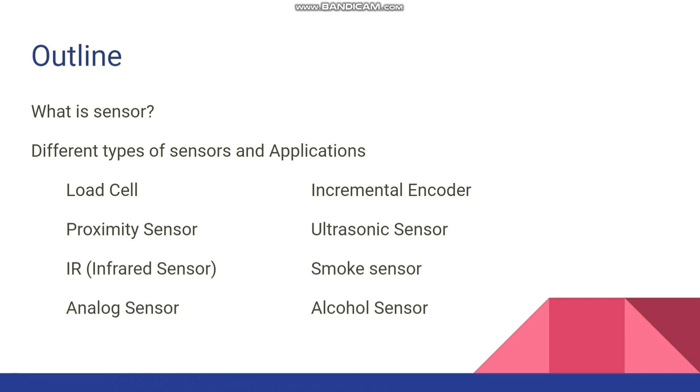and alcohol sensor. So let's define first what is a sensor. According to Merriam-Webster Dictionary, its definition is a device that responds to a physical stimulus such as heat, light, sound, pressure, magnetism, or a particular motion, and transmits a resulting impulse as for measurement or operating a control.

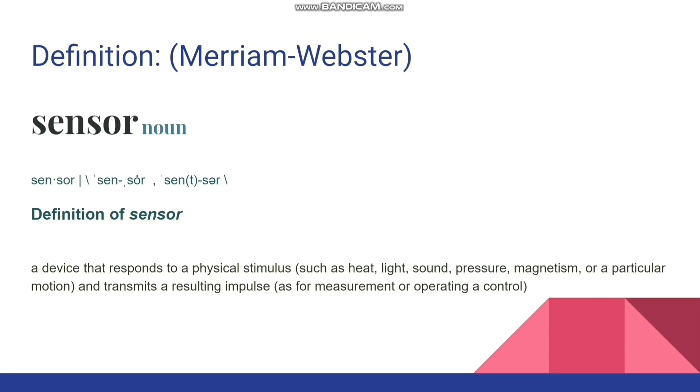So these are the block diagrams where a sensor is actually being used. Frequently measured values are temperature, pressure or force, flow, humidity, pH value, revolution per minute or speed or velocity, and also the position.

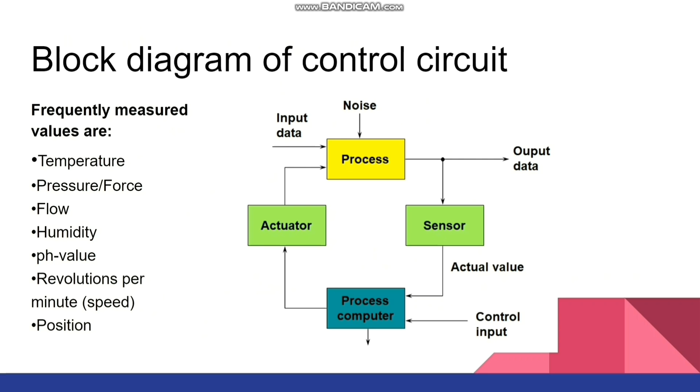So the advantages of sensors: there is no physical contact and therefore no stress, no wear, tear, and hence long life. Contactless, and therefore maintenance free. Electronic high precision, protected and safe switching in harsh environments, high switching rate, bounce-free contact, thus not prone to pulses.

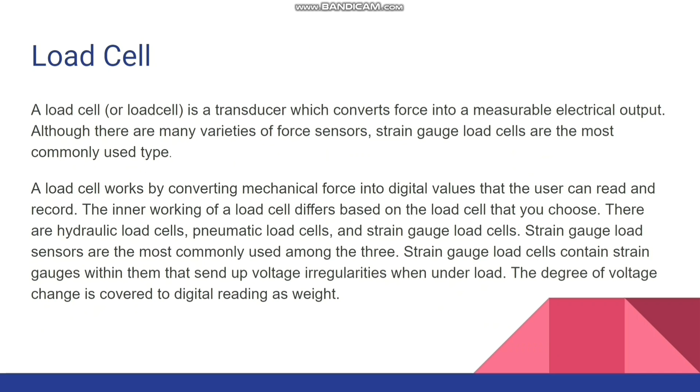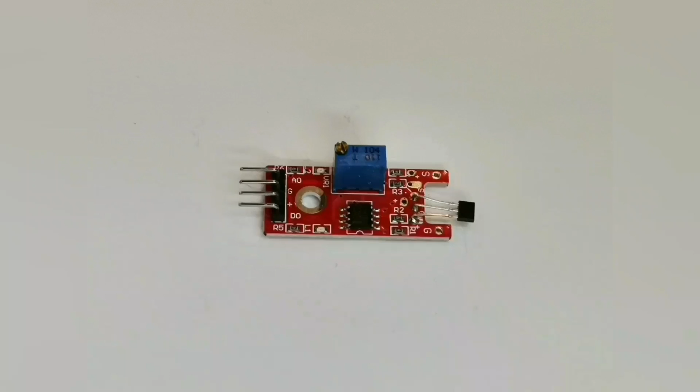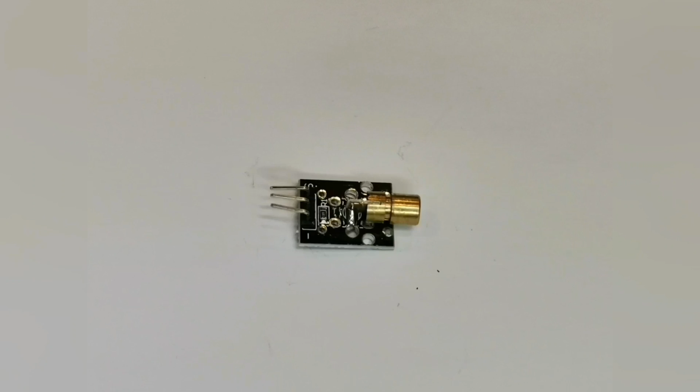Mechatronics engineering deals with various sensors depending on the different applications for your project needs. In this lecture, I will be discussing different sensors from what I bought online, the 37 sensor kit.

This time we will talk about proximity sensor. A proximity sensor is an electronic sensor capable of detecting the presence of nearby objects without physical contact. It emits an electromagnetic field or a beam of electromagnetic radiation, for example infrared, and then looks for the changes in the return signal or field.

The object that is being sensed is the proximity sensor's target. Depending on the proximity sensor's target, different sensors may be used. For example, an inductive proximity sensor requires a metal target, whereas a capacitive or photoelectric sensor may be suitable for a plastic target.

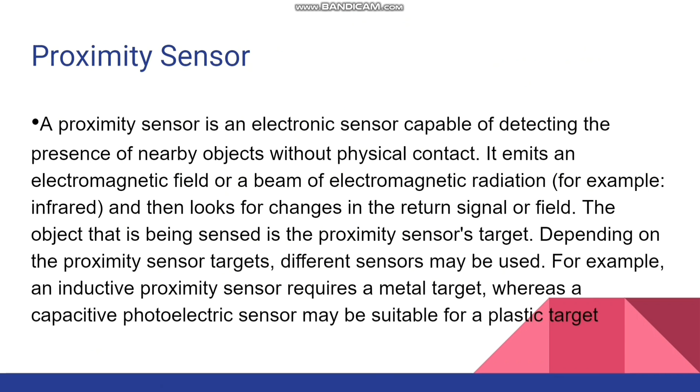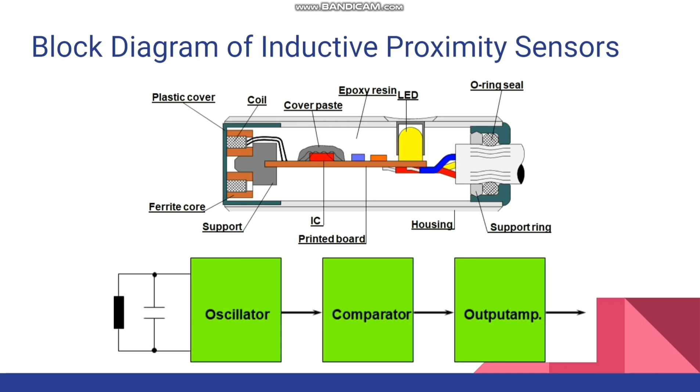On the lower part of the illustration is the block diagram of the inductive proximity sensor, whereas there is an oscillator, comparator, and the output amp.

So the physical basics of the proximity sensor: the alternating electromagnetic field created by the coil induces eddy currents in the target if the target is made of non-ferromagnetic material. Then the alternating electromagnetic field created by the coil induces eddy currents and generates magnetic losses in the target if the target is made of ferromagnetic material. Magnetic losses are higher than the losses generated by the eddy currents.

Operating distances may vary on the target materials and are normally shorter than the usable operating distance. They may increase in case of a target of thin foils. So the basics of the inductive sensor: there is a primary circuit or sensor coil, then there is a secondary circuit for the target.

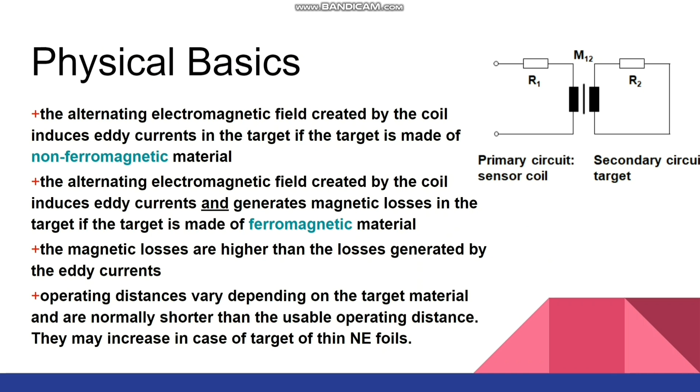So the definition of operation: SN meaning rated operating distance, or SN is the rated operating distance. SR is the effective operating distance, wherein SN times 0.9 is less than or equal to the effective operating distance, or less than or equal to 1.1 times Sn.

So SU is the usable operating distance. These are for the single proximity switch: voltage between 85% and 110% of rated operating voltage, temperature range of negative 25 degrees Celsius to positive 70 degrees Celsius.

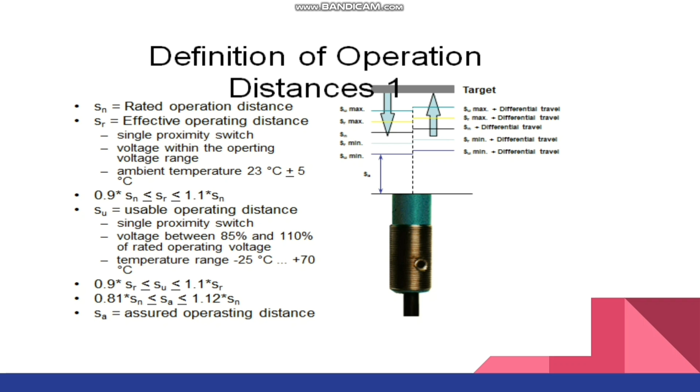So these are the basics of distances: usable operating distance, rated operating distance, and effective operating distance.

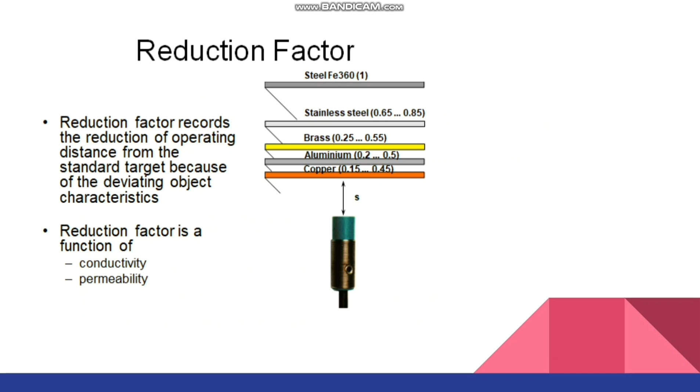So there is a reduction factor. The reduction factor records reduction of operating distance from the target because of deviating object characteristics. Reduction factor is a function of conductivity and permeability, so depending on the material, there are different reduction factors.

So the influence of target characteristics: when the area A times B is smaller than the area of the standard target, operating distance decreases. Whereas when the area A times B in the diagram is larger than the area of the standard target, there is no influence.

When the target is thicker than the standard target, the influence is a function of penetration depth - low penetration depth and high penetration depth - for small and big proximity switches respectively on operating distance. When high penetration depth or big proximity switches, operating distance decreases.

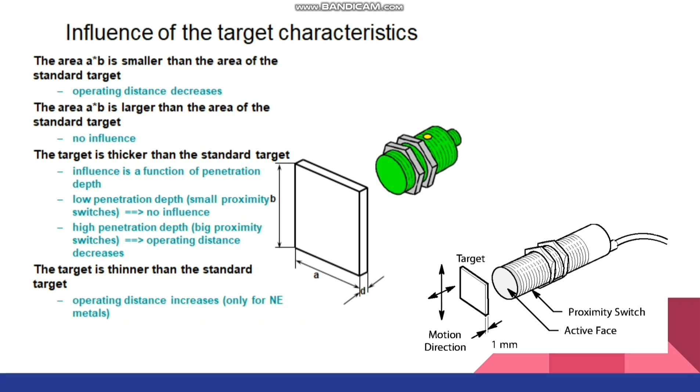So the target is thinner than the standard target. When the target is thinner than the standard target, operating distance increases only for NE metals.

Differential travel: this is the distance between the operating point when the target approaches the proximity, this is the differential travel H, less than 20% of the effective operating distance, or SR.

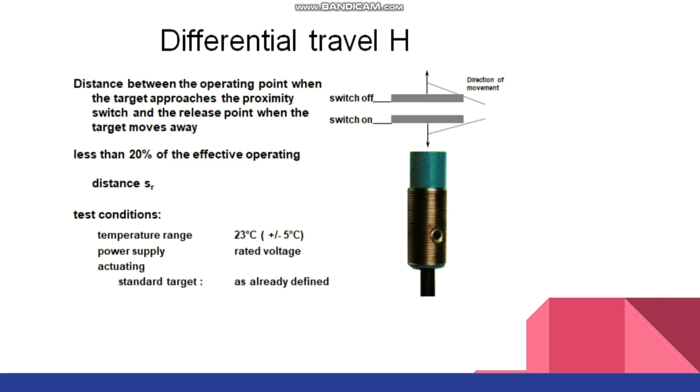Frequency of operating cycles for inductive proximity sensors is the number of operating cycles performed by the proximity switch during a specified period, this is the frequency of operating cycles, or F. This value is a function of the oscillating frequency of a given proximity switch. High oscillator frequency means small operating distance or high frequency of operating cycles, whereas low oscillator frequency means large operating distance with low frequency of operating cycles.

So this is how we connect it with the PLC. It could be wired NPN or PNP. Maximum frequency of operating cycles is 5 kilohertz, or equal to 200 microseconds.

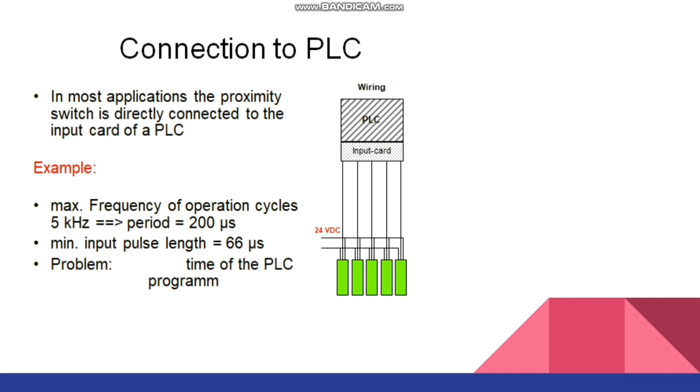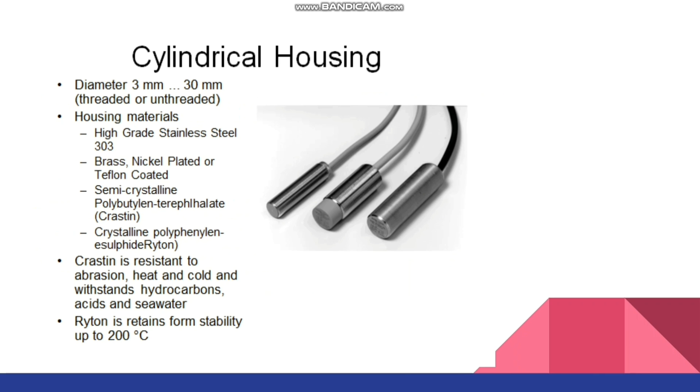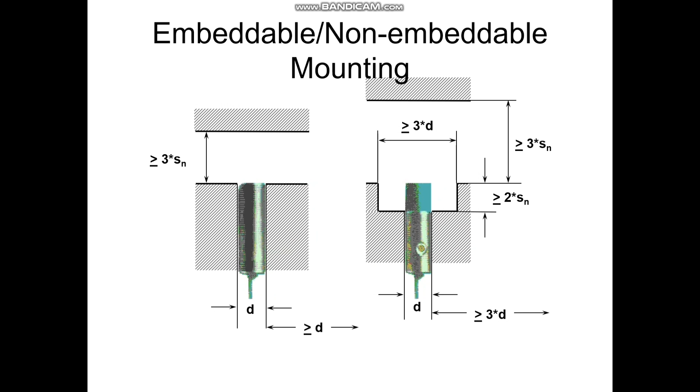Then there is a cylindrical housing with a diameter standard from 3 mm to 30 mm. This is the embedded and non-embedded mounting for the inductive proximity switches.

There are advantages and disadvantages of embeddable mounting. Advantages: no mutual influence when the distance between two proximity switches is greater than the diameter or length of the sensing face, real flush mounting in conductive material, and less sensitivity than non-embedded mountable proximity switches to fault-inducing influences.

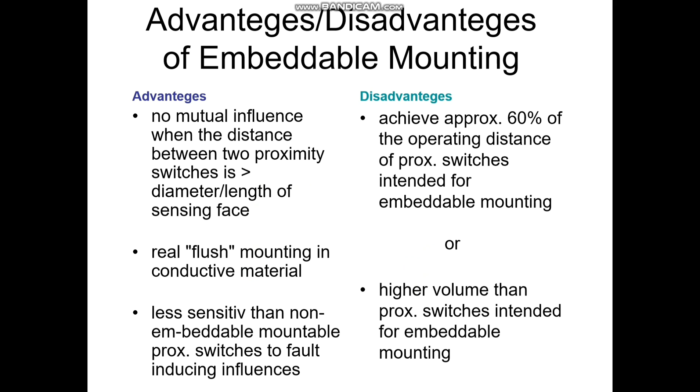The disadvantages: there is an achievement of approximately 60% of the operating distance of proximity switches intended for embeddable mounting, or there is a higher volume than proximity switches intended for embeddable mounting.

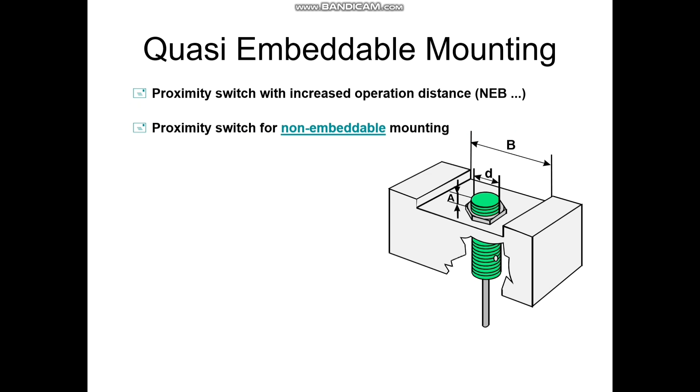So this is the quasi-embeddable mounting - proximity switches with increased operating distance, proximity switches for non-embeddable mounting. For ferromagnetic materials, A is equal to 0.2 times D.

Then for non-ferromagnetic material, A is equal to 0.1 times D. For non-conductive materials, A is equal to 0. Distance between two proximity switches is equal to D.

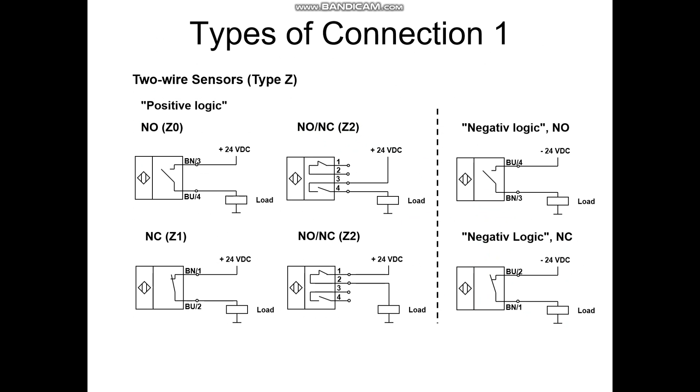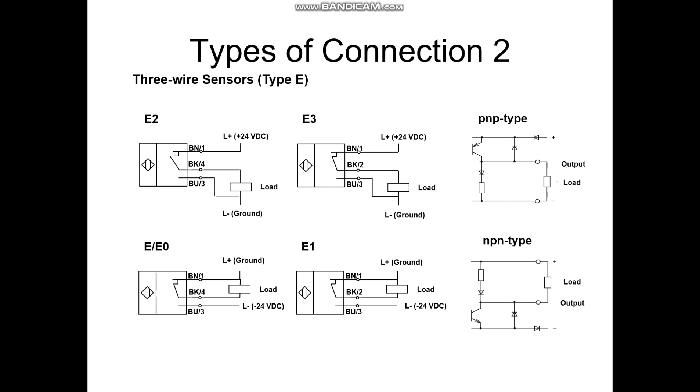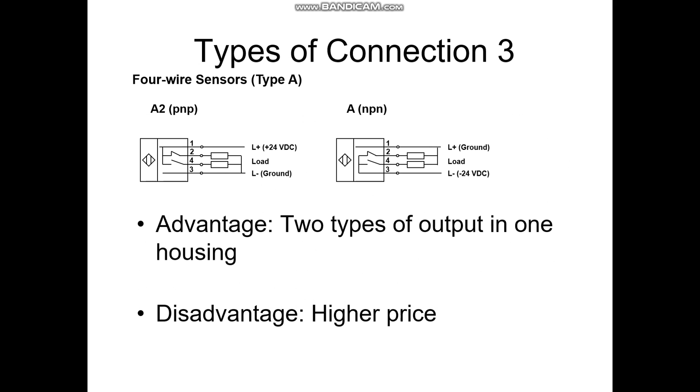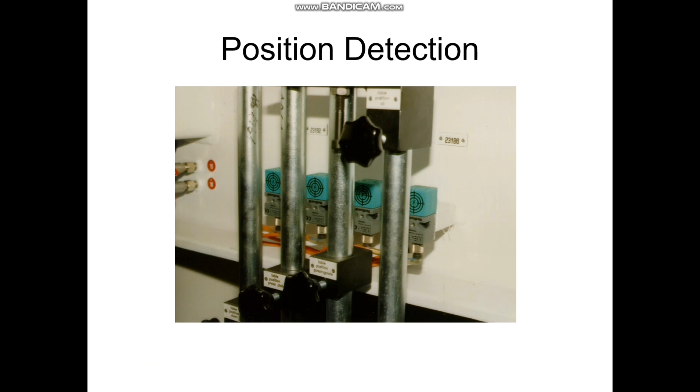Disadvantage: higher price. Examples of inductive proximity switches are position detector for doors, position detection for conveyor systems, detection of position for fluids, speed control for conveyor systems, and thread control. There are other examples, but these are the example applications for this particular inductive proximity switch.

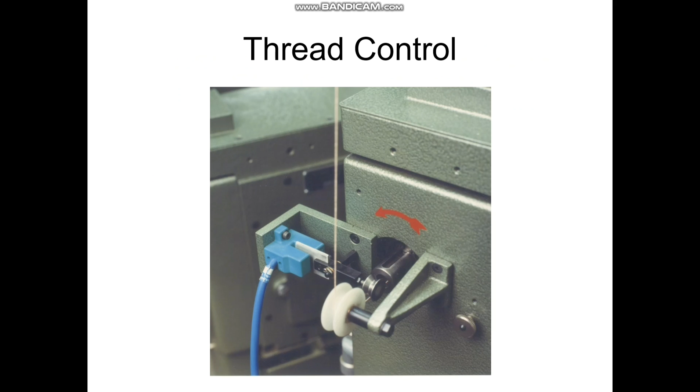So another type of proximity switch is the capacitive proximity switch. The characteristics of this type of switch detect every type of material like conductive, non-conductive, solids, and liquids, depending on the dielectric constant.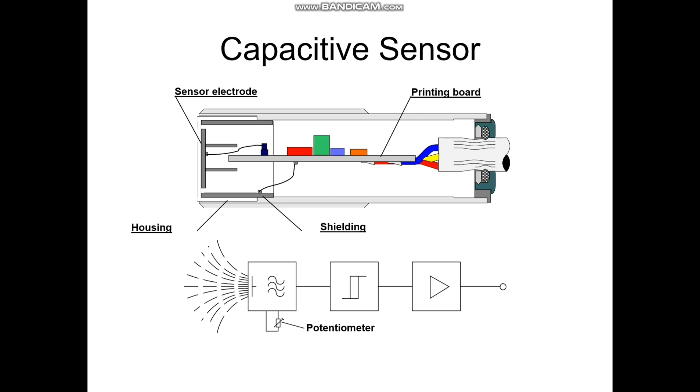There is a potentiometer wherein you can adjust the dielectric constant or the sensitivity of your sensor depending on the material that you are going to use.

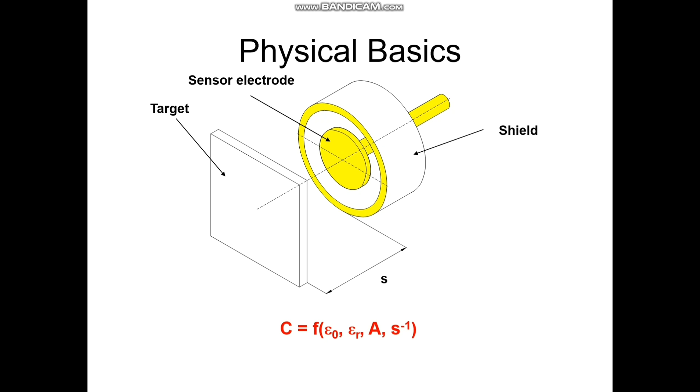Then there is the physical basics of this particular sensor: a shield, the electrode or sensor electrode, and the target. There is a particular distance which is the operational distance of the sensor to the target.

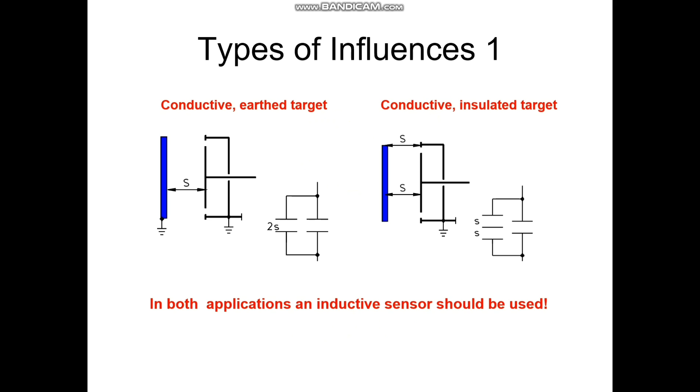Types of influences: conductive earthed target and conductive insulated targets. In both applications, an inductive sensor should be used. Number two, influence - this is the typical application of capacitive sensor. The switching distance depends on the relative permittivity, or the reduction factor.

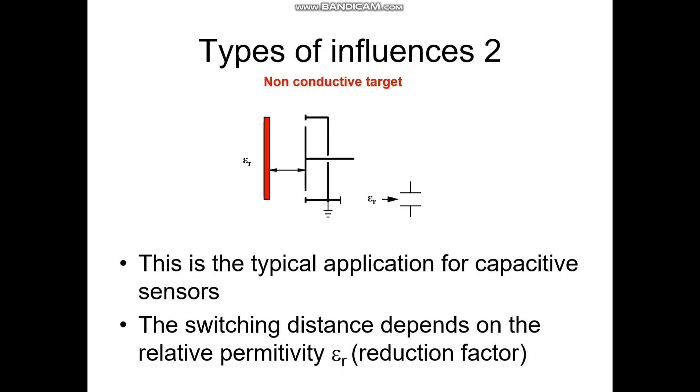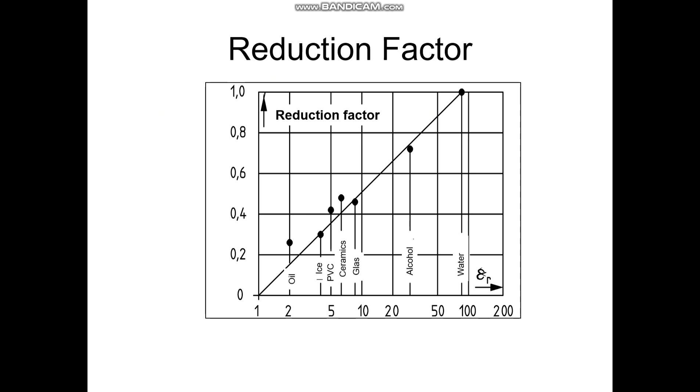Permittivity. So depending on the material, there is a reduction factor of the sensor.

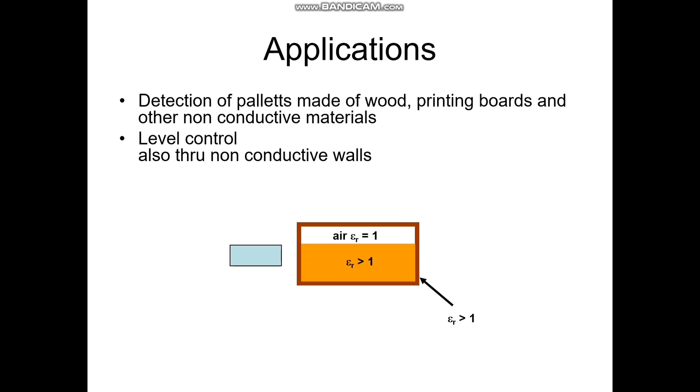This is the oscillator circuit of the sensor, from oscillator to amplifier. The application is the detection of pallets made of wood, printing boards, and other non-conductive materials. Level control through non-conductive walls.

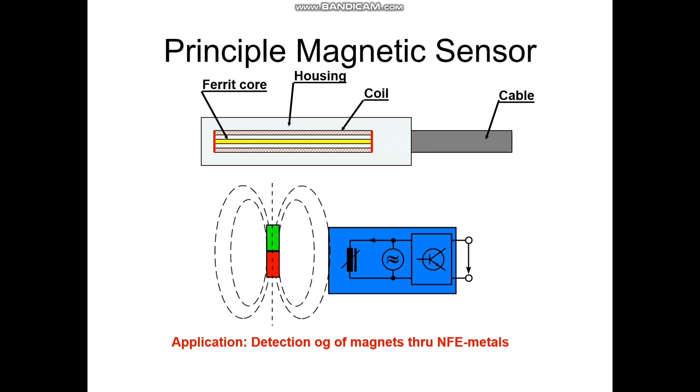Principle of magnetic sensor, since this can detect the magnetic material, this is the detection of magnets through NFE metals.

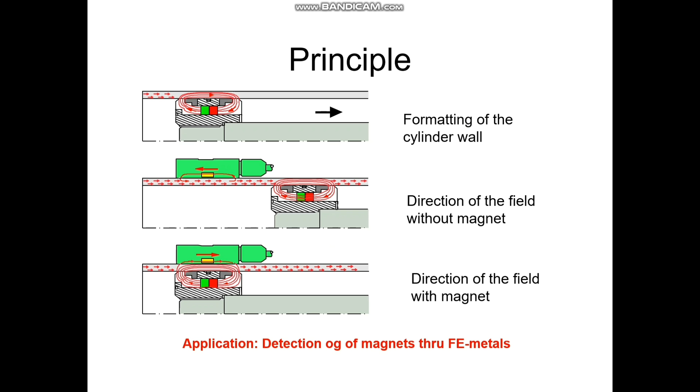The application: the sensor for the detection of position of piston in hydraulic cylinder. Integration of metal or magnets in the cylinder wall or in the cylinder application.

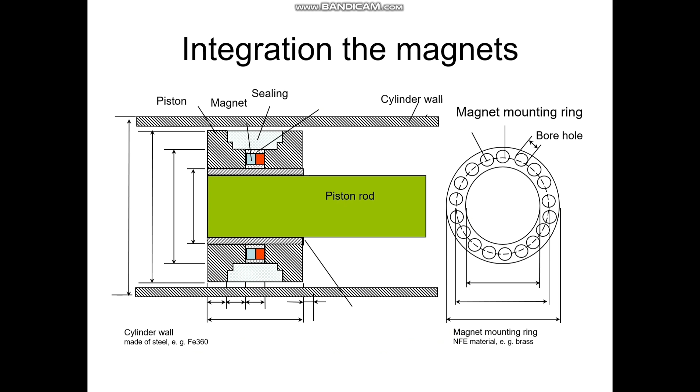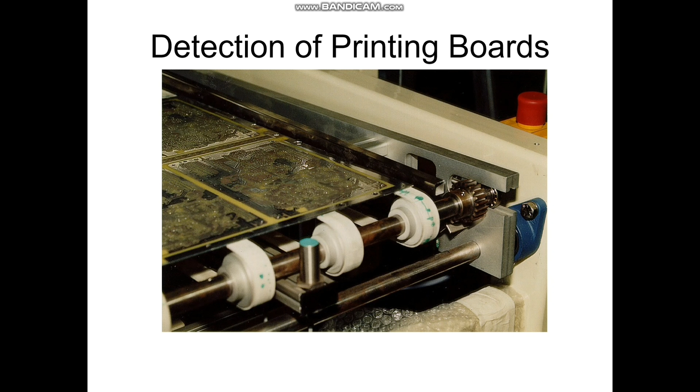So the principles - this is a sample of using the magnetic sensor or the magnetic proximity switch. Detection of printing boards, detection of undercarriage position, and this is the sample.

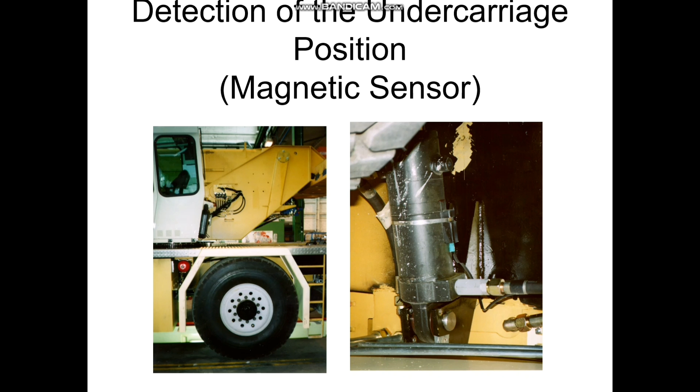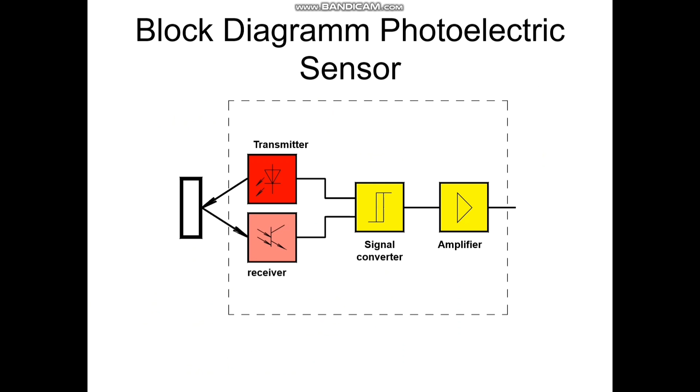The next type of sensor that I would like to introduce is the photoelectric sensor. This is the block diagram of the photoelectric sensor, wherein there is an amplifier, signal converter, and the receiver or transmitter of the signal from the target.

So there are three types of mode of operation of the photoelectric sensor. There is a transmitter-receiver, direct detection sensor, wherein in a module there is a transceiver, meaning transmitter and receiver in one module, and there is an object being detected.

Through-beam sensor, wherein there is a separate transmitter and receiver. If the object is detected, it is because the object has hindered the transmitter from transmitting the signal to the receiver module.

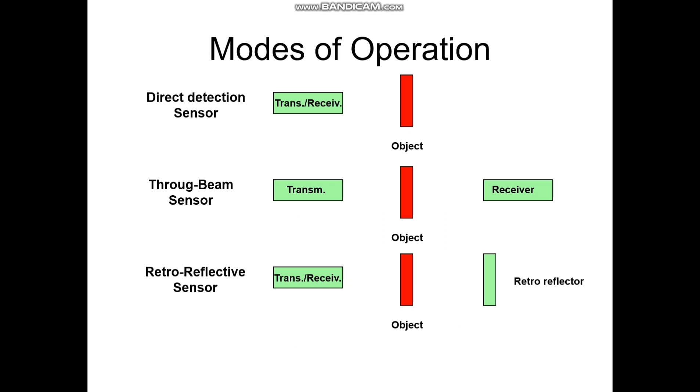Then there is a retroreflective sensor, wherein there is a transmitter and receiver in one module, but you need a retroreflector so that the signal coming from the transmitter is received, with the use of the retroreflector or a mirror.

Mode of operation: direct detection sensor, detection of all materials, reduction factor of 0.015 for tires up to 4.5 for stainless steel. So there are considerations of material for the reduction factor.

Then the through-beam sensor has problems with materials like glass. Also for the retroreflective sensor, there are minor problems with mirror objects and objects like glass.

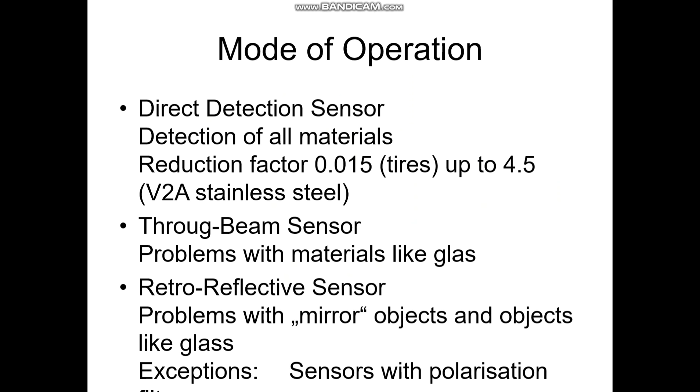Exceptions: sensors with polarization. So there is a sensor that is capable of using a polarization filter.

Disadvantages and advantages. Advantages: non-sensitive against changes in temperature and pressure, small housing compared to ultrasonic sensor, small object detectable, especially laser version and fiber optic version, and high measurement range.

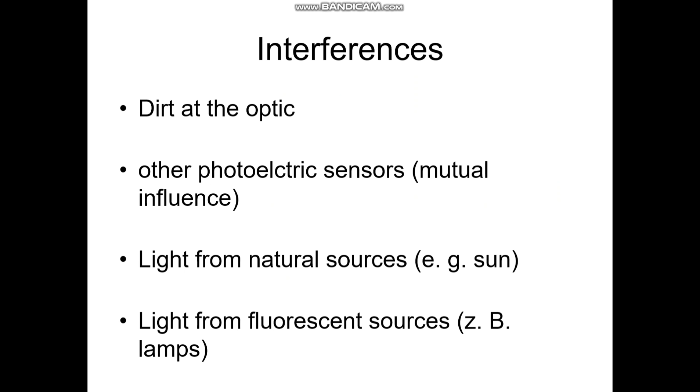For the disadvantages: there are problems in sensitivity against dirt, background reflection, or light from foreign sources, and reduction factor or diversion only. Interferences include dirt at the optic, other photoelectric sensors with mutual influence, light from natural sources like the sun, and light from fluorescent sources such as lamps.

So there is a signal processing that should be done for the photoelectric sensors.

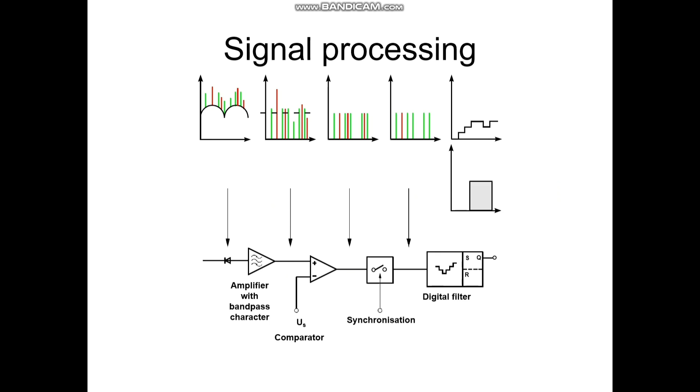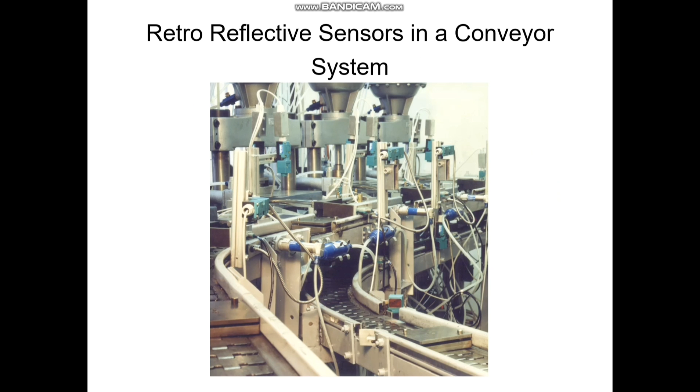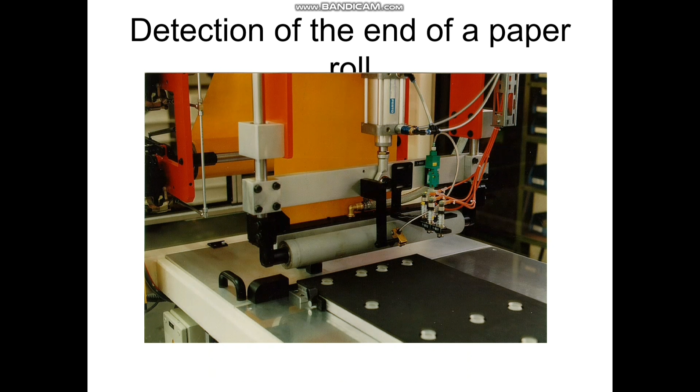Examples of photoelectric sensors: example applications include assembly machines, retroreflective sensors for conveyor systems, detection of coil body, conveyor system with interface connection, AS interface connection, detection of paper roll, level control, and furniture production. So that's it for the photoelectric sensor.

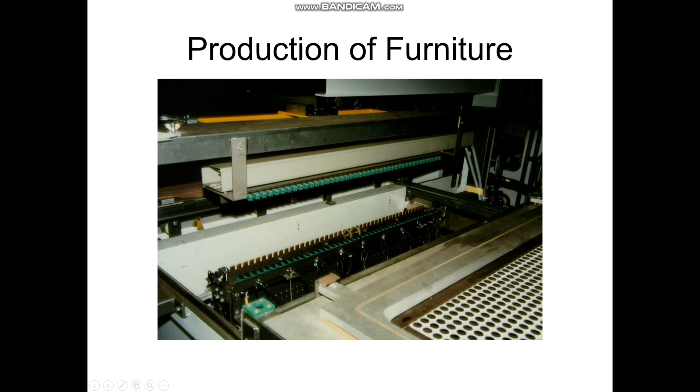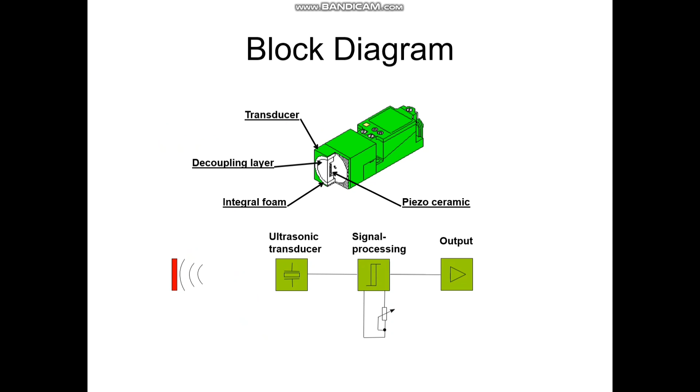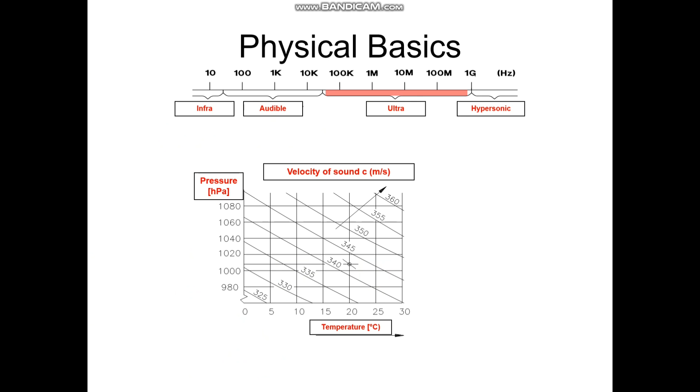The next type of sensor I will be discussing is the ultrasonic sensor. The ultrasonic sensor has this block diagram: ultrasonic transducer, signal processing, and the output for the PLC or microcontroller. The operation of ultrasonic sensors should be in the range of ultrasound, and this will be advantageous for level detection.

Characteristics of ultrasonic proximity switches: it detects objects which reflect or absorb sound. Operational distance up to 12 meters. Reaction time is less than 35 milliseconds. Ambient temperature is 70 degrees Celsius. Maximum protection class is IP67. Lower noise immunity and non-sensitive to dirt or dust.

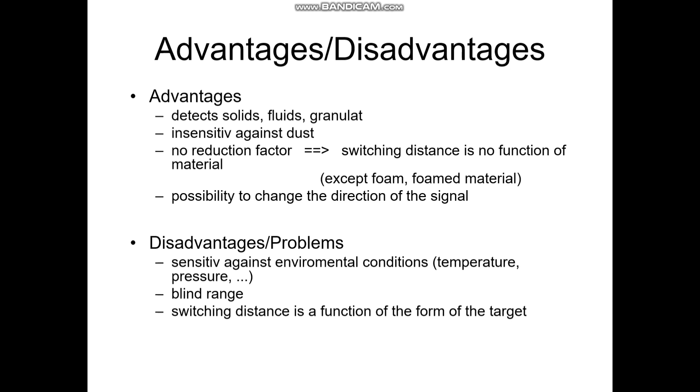Advantages and disadvantages: advantages of the ultrasonic sensor include detecting solids, liquids, and granulates, insensitivity against dust with no reduction factor, and the possibility to change the direction of the signal. Disadvantages are that it has a blind range, is sensitive against environmental conditions, and the switching distance is a function of the shape of the target. So there is accuracy, repeatability, and non-linearity that we should consider in the ultrasonic sensor.

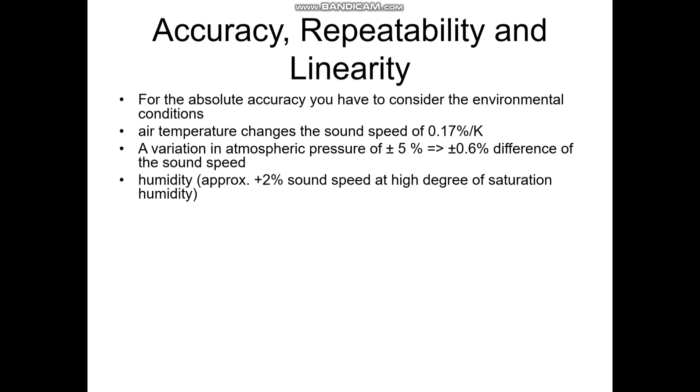For absolute accuracy, you have to consider the environmental condition. Air temperature changes the sound speed by 0.17% per Kelvin. Variation of atmospheric pressure of plus or minus 5% causes a plus or minus 0.6% difference in sound speed. Humidity causes approximately plus 2% sound speed at a high degree of saturation humidity. There are also influences of turbulent air and temperature variation in the air between sensor and target. The tolerance of ultrasonic components and damping affects the transducer, and generally the accuracy can reach greater than 2%.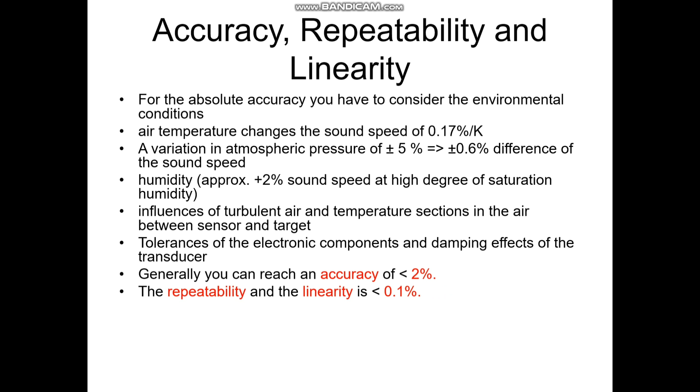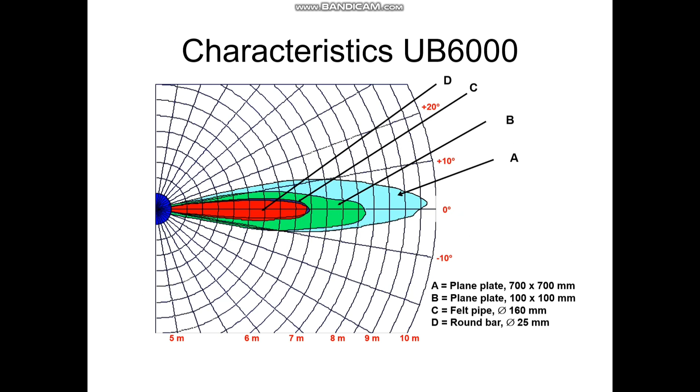Non-linearity, repeatability, and linearity of 0.1%. There are characteristics depending on the model — this is the UB6000. The characteristics depend on the length and width; the target must be longer than the detection area relative to the response time.

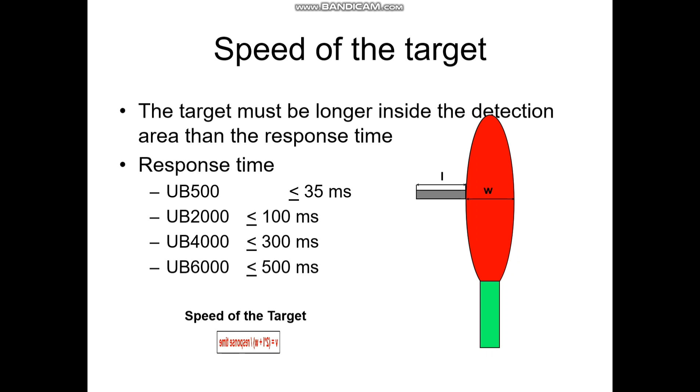We're going to talk about the speed of the target. Depending on the model, it has the response time of the respective model. The consideration is the length and width of the ultrasonic sensor detection. So speed of the target is equal to 2 times length plus width, over the response time of the model.

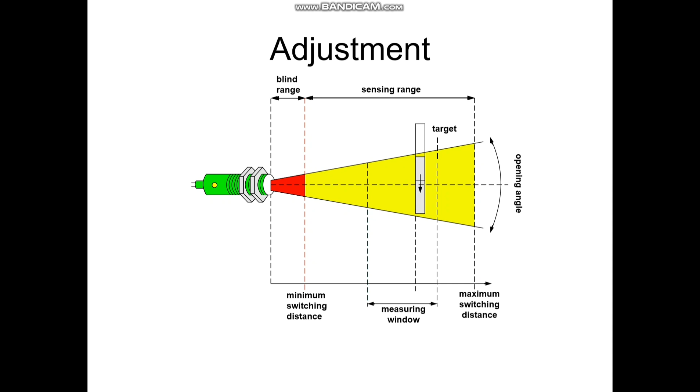There is a blind range as per the adjustment. There is a minimum switching distance and a maximum switching distance, wherein there is a switching window, or measuring window, for the sensing range.

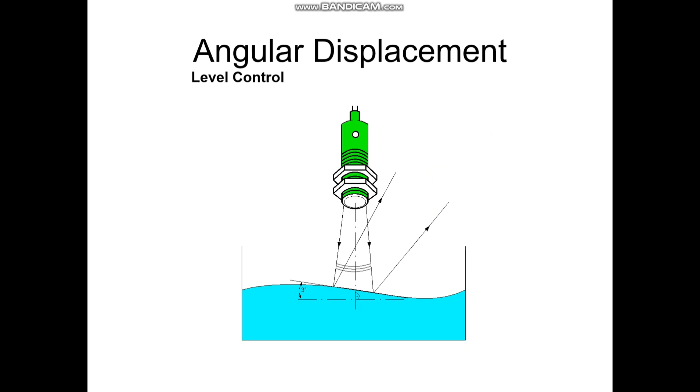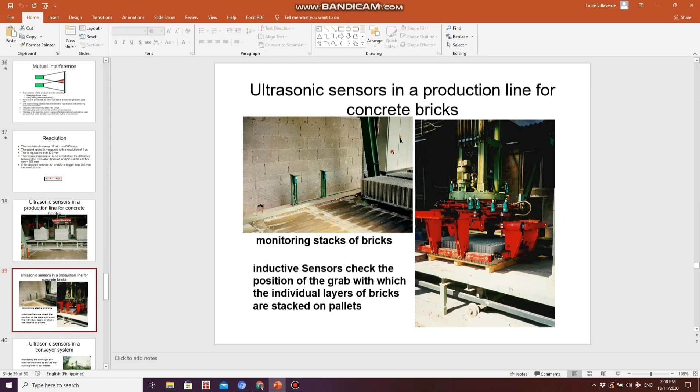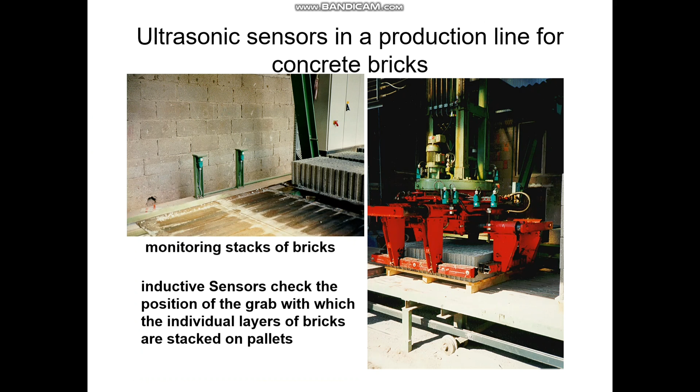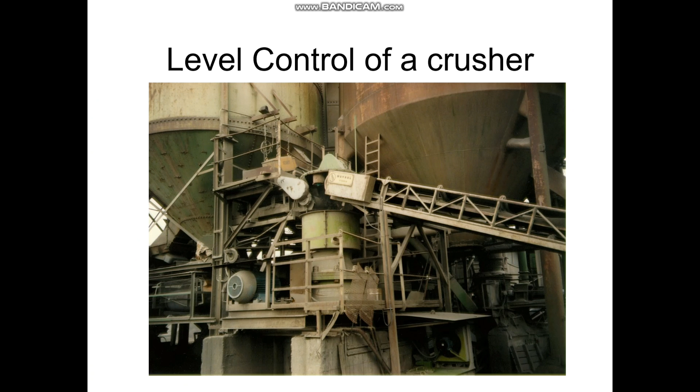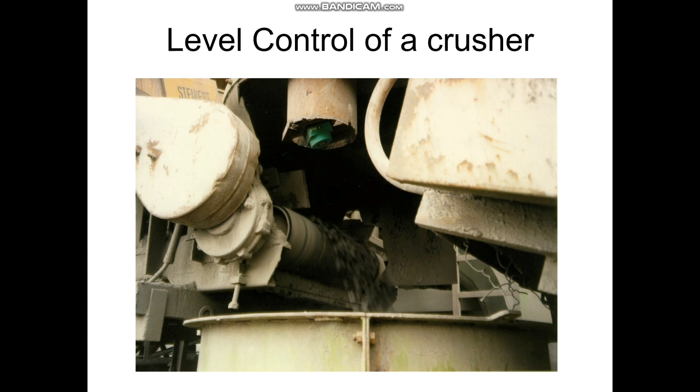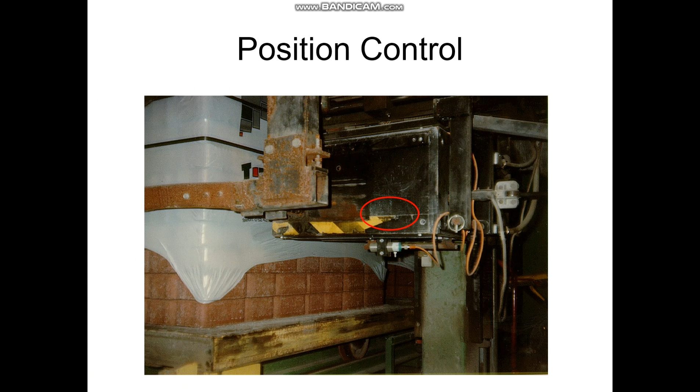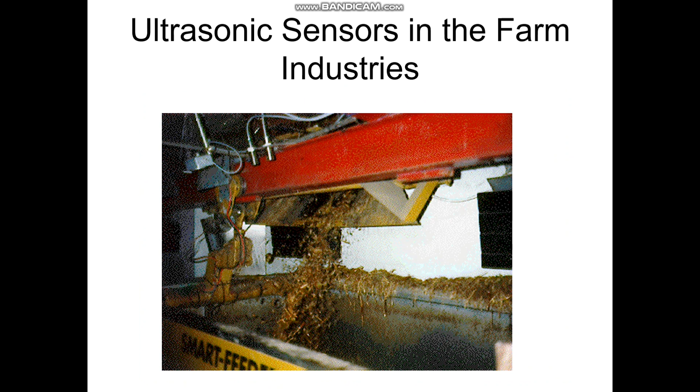Level control for transportation systems, level control for silos, collision avoidance, and ultrasonic sensors for the farm industry. So that's my presentation for the ultrasonic sensor.